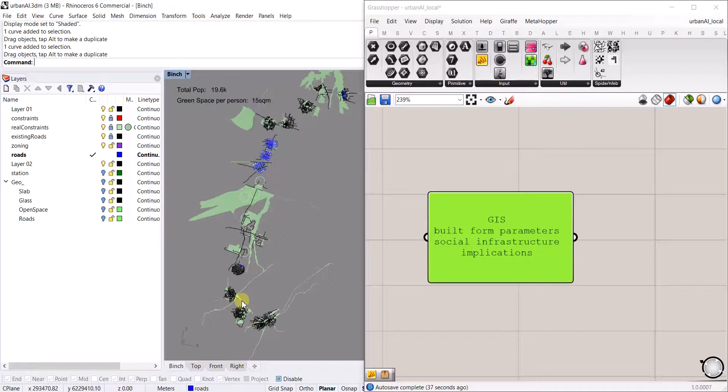automatically. So we have this north-south rail corridor with these station locations that have been nominated. They are completely arbitrary according to the script. The green represents constraints, so you can see a flood layer there, you can see a noise contour there, and we're focusing on this station here, which is sort of station number 15 on the line.

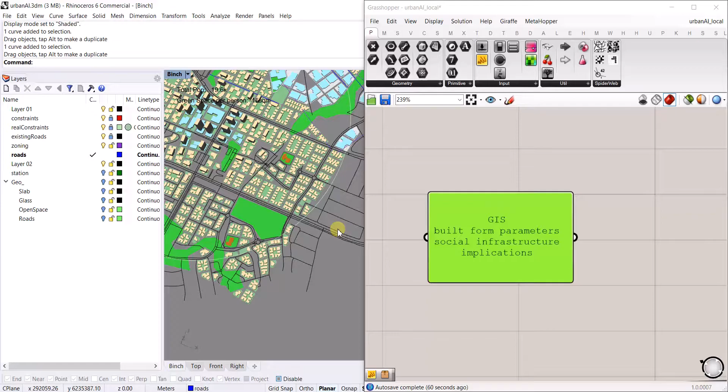We're using the OpenStreetMap API to pull the existing road center lines, and then we're allowing the user to draw these blue lines to be new roads which they want, which the script will respond to, but the script will also generate its own road network as well.

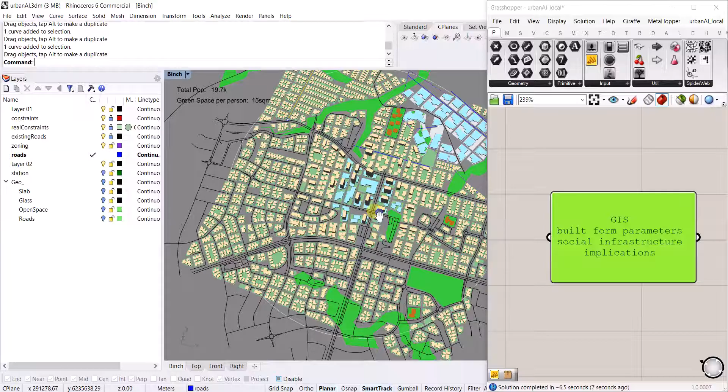And then basically the center of this sort of green circle you can barely see there is the station, and the script places built form within 800 meters of the station. It places residential built form and tries to create built form that is representative of what a residential floor plate is, as well as commercial built form, which the user can control using these curves here.

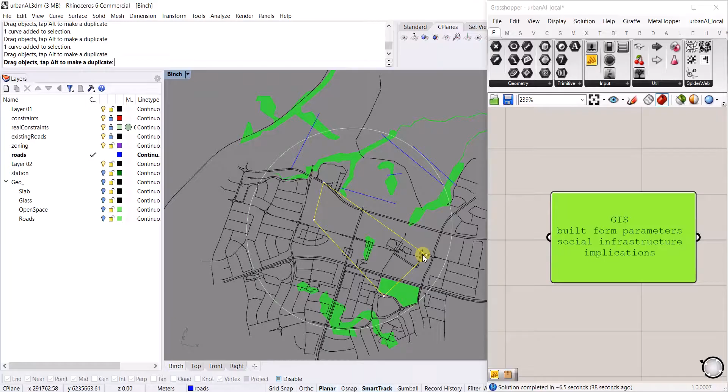So this curve is a commercial zoning, and if we pop that right in the middle there, then the entire central area of the precinct would be commercial, and you can see that the built form footprints have changed, and the towers there are much bigger, sort of commercial towers. So there's quite a high degree of parameterization in the script.

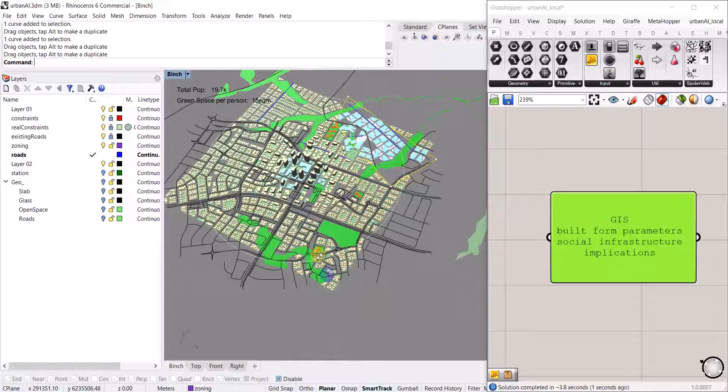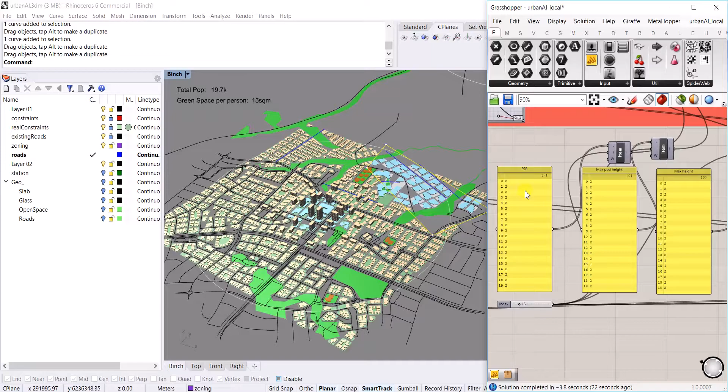I think there's about 5 or 6 parameters, but I'm pretty happy with the variety and sort of realistic built form we're getting with these very few parameters. So let me just go through those built form parameters. And here they are really. There's slightly more than this, but these are the 3 main ones. It's an FSR control, a max podium height, and a maximum height control.

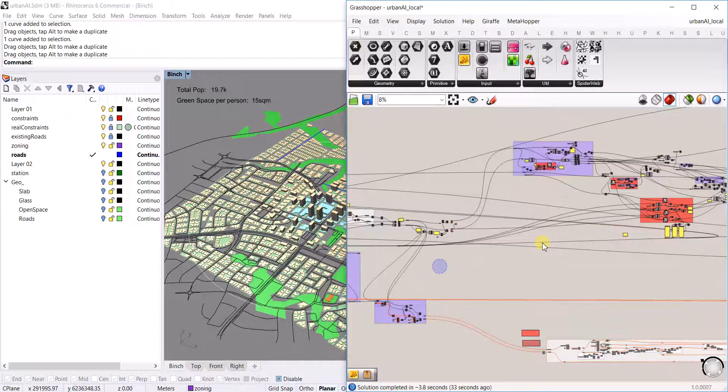The way we deal with them in Grasshopper, we come back from here, create the lots, do something else here, split large podiums, create the podiums here, and then really drive the built form with these controls here. They do it in two steps.

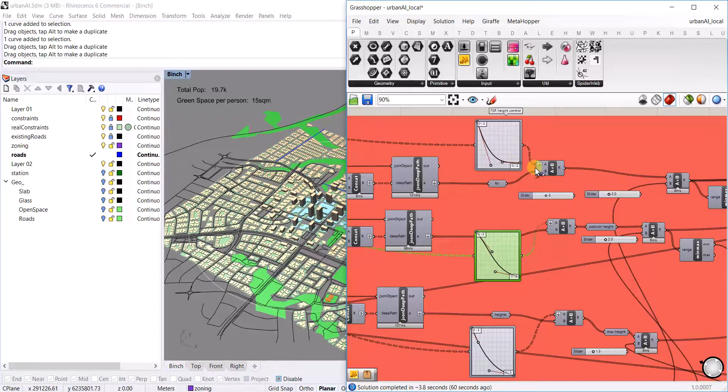The first step is they map the distance from the station to the cadastre in question, with this downward fall. So cadastres close to the station have this high FSR, and as they fall away from the station, they get this lower FSR. Same with podium height and height. And then to make things a bit easier, we just multiply them by a factor, which is arrayed here, and we're dealing with station 15.

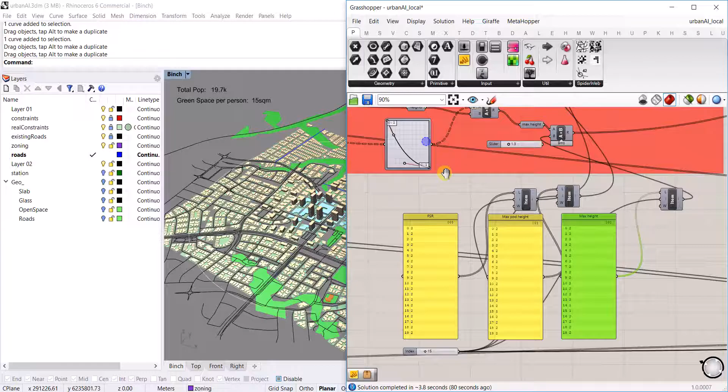So if we were to change the mapping of the height ever so slightly, and then change the FSR factor, we will see a big impact. So I think that's 15. So instead of multiplying the FSR by 2, we're multiplying by 5. Then instead of multiplying the podium height by 1, we multiply by 2. And then instead of multiplying the height by 1, we multiply by 2.

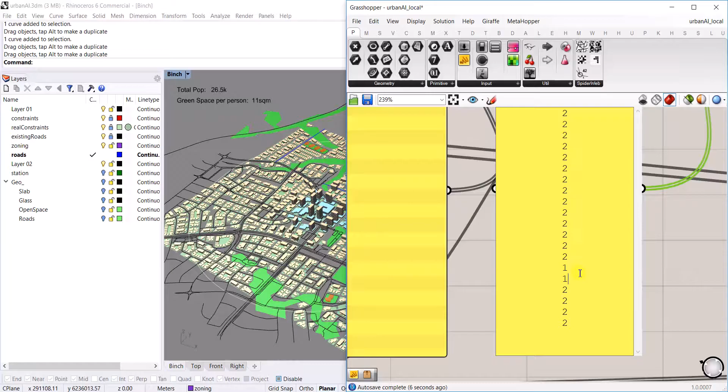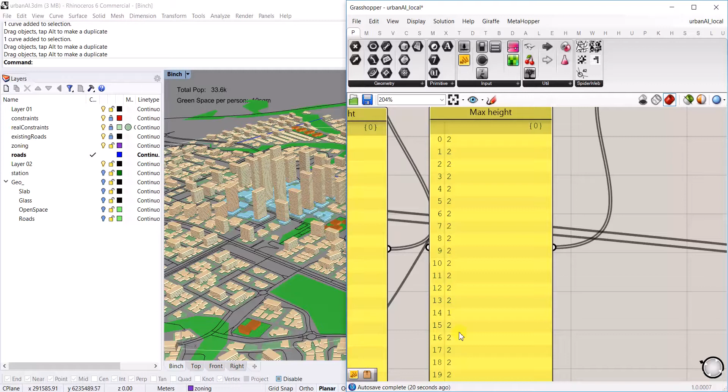You can see that the built form really starts to take off, as each of those constraints is limiting. So by multiplying the FSR by 5, if we go and actually look what we're getting, the maximum FSR around the station is now 15. If we lower the height control to that 1, the script will determine that you can't achieve the full FSR, so the height becomes the limiting factor.

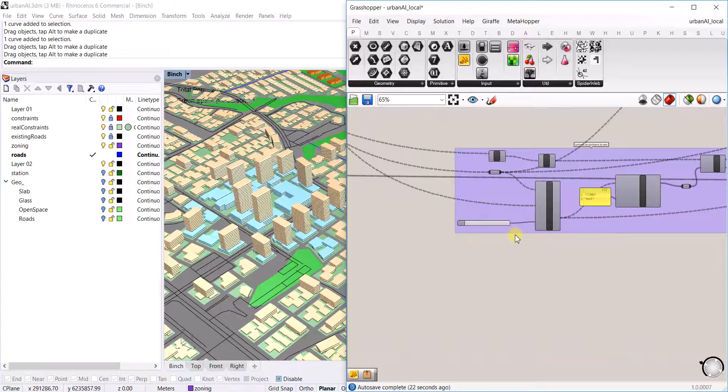So these constraints are sort of AND constraints, so all of them have to be true in order for the script to place height. So that's the built form. The next thing that we do is we can change use depending on how close it is to the station.

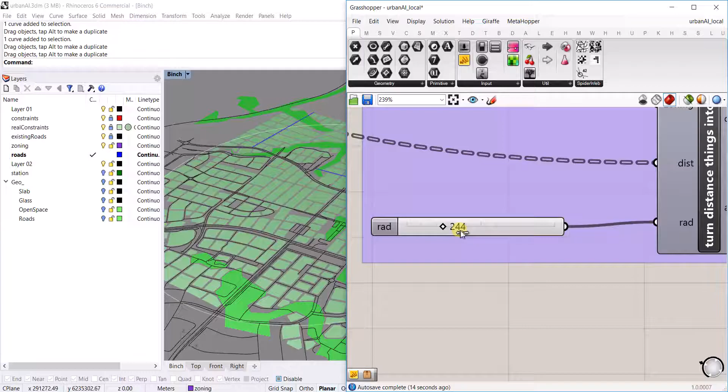So as we change that toggle there, you can see that the mixed use podiums become blue, or become commercial, and that allows you to say, well, within the precinct close to the station, let's have the ground plane really active before we slide to a pure residential mix.

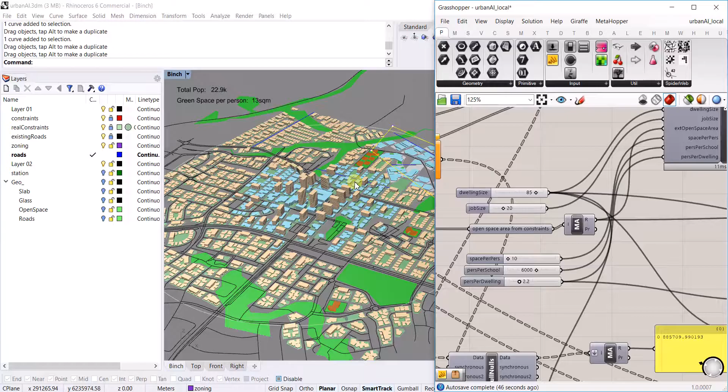And then the final thing, which has been quite cool, is this mess over here, which is the production of a social infrastructure allowance. And I know there's a sort of scientific method: you take the FSR, you take the number of people that you're going to put on an area, and you multiply it by a factor. I think it's number of people, or people per hectare divided by 1 plus factor, something like that, in order to generate the right amount of open space.

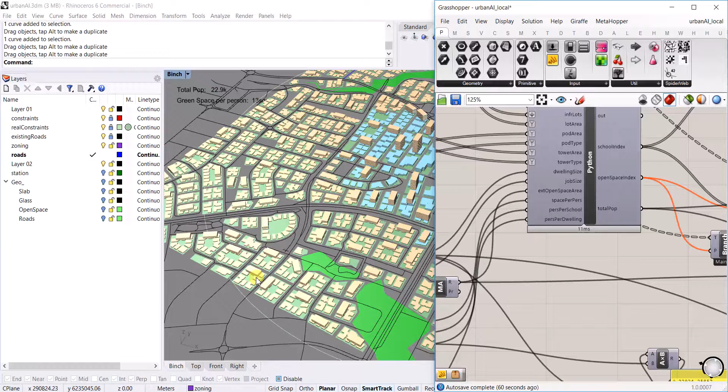What I'm actually doing with the Python script here is just literally taking the built form and then looping through every cadaster, counting up the number of people in each cadaster, subject to these assumptions, dwelling size and persons per dwelling. And then if the space required gets too big, it just turns the next cadaster into open space and then continues on the loop in that way.

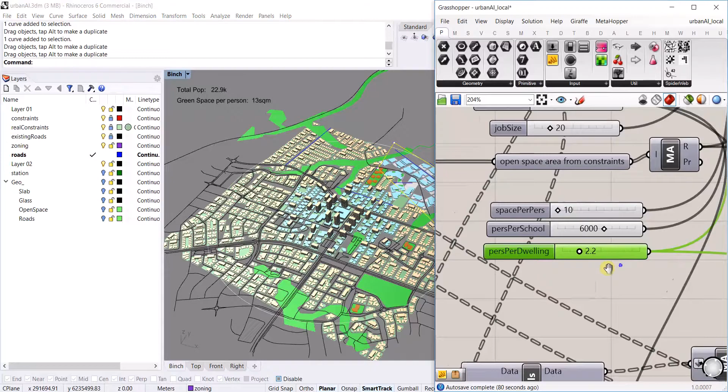So what we can do with this control here, the space per person, which I've set to 10, which is low, is run that. So if we crank that to 28, you can see a bunch of cadasters turn into green. I'll do that a bit slowly. You can see that as this slides up, cadasters start getting punched out. Now, unfortunately, the script's not smart enough to keep those parks out of the industrial zone yet, but we'll get there at some point.

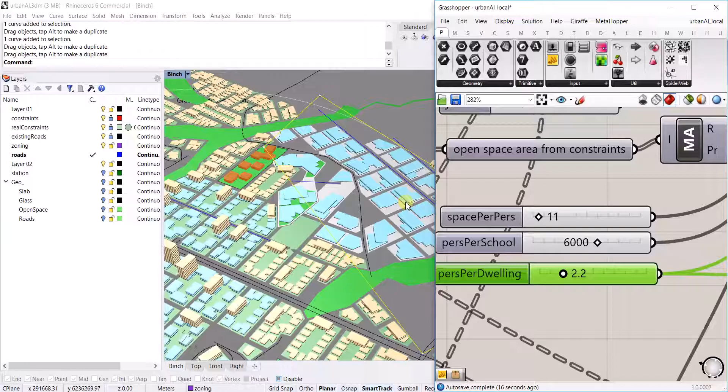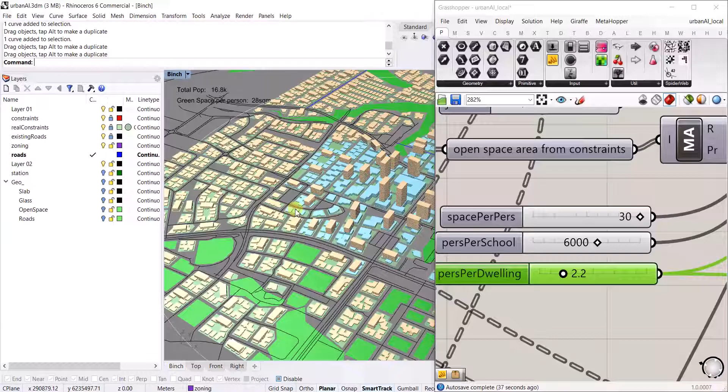And as I do that, you can see the total population falls, and that's because these cadasters here, which used to be residential, have now been converted to open space in order to achieve that number. So this calculation does include the open space from the constraints, so we minus those or use them fully, and when they're fully used, then we start eating into our residential space. And it does exclude this sort of private open space in these mixed use lots. And it's the same thing with schools.

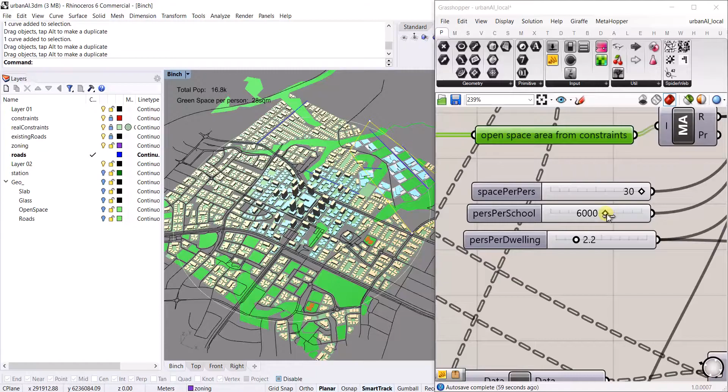So I've got 6,000 people per school, and if we change that, we'll get more schools appearing. So now you can see I've got the reds of the schools. 1,000 per school, we're getting schools all over the shop. And of course, that person per school could be used as person per whatever bit of social infrastructure you wanted, dentists or anything. Yep, so that's, I think, the full scope of what I wanted to explain.

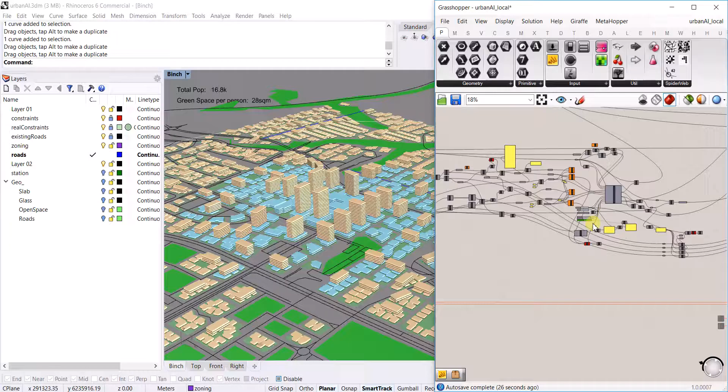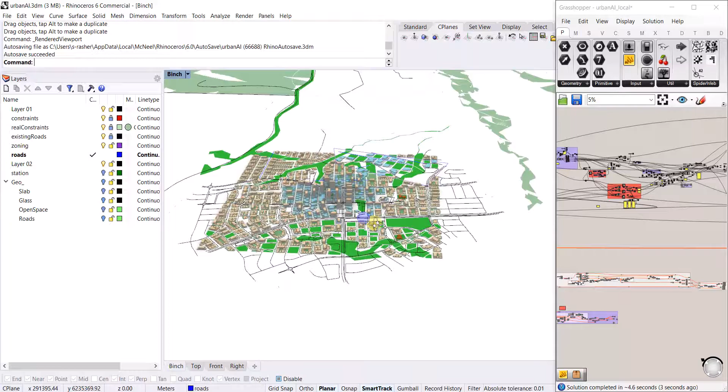I think the discussion I wanted to have is just how nice it is controlling a multiplicity of variables using these high-level factors. So using just FSR, some key ratios, social infrastructure ratios, and nothing else, you're able to generate quite a lot of built form. So if I send the space per person up to 30, and then we crank the height and allow it to come back up, hit 2, what happens is the population jumps, and the number of open spaces also has to jump.

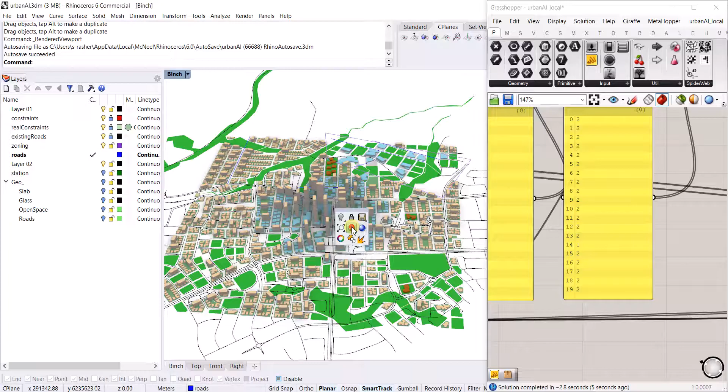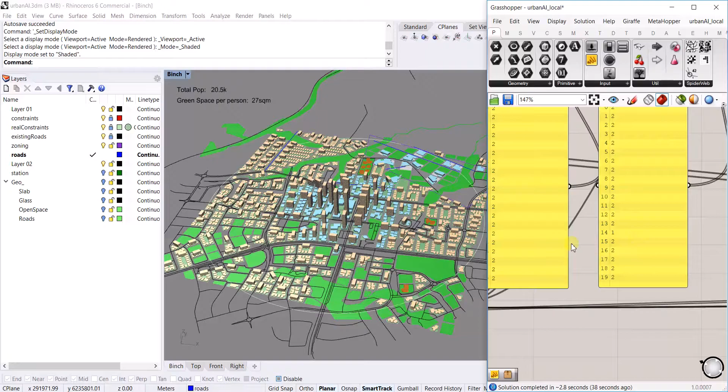I have to get out of this view, into this non-rendered one to see. So the population jumps by 1,000 in the center, but then it actually doesn't jump as much as you would have expected, because it starts knocking out basically all of the residential around, because the open space requirement dictates that these guys need all the space over here. So understanding the connection between the requirement for open space and the population density is interesting, but also the built form outcome like this feels like a very different place to the place that we had just before when we knocked that down to 1.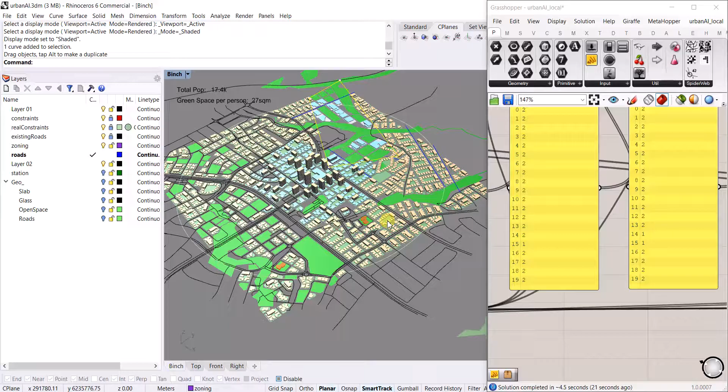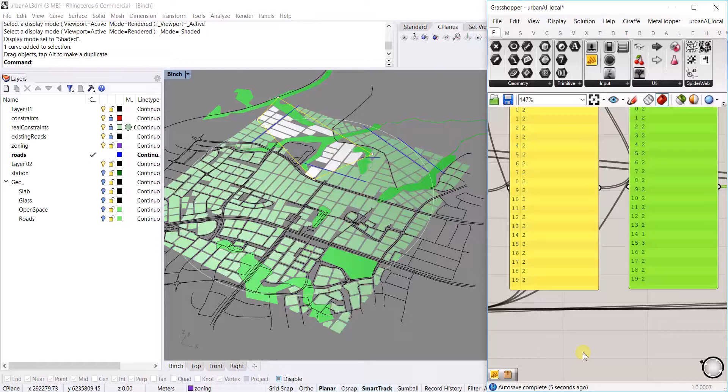So, if you do zoning, height of building, FSR, and some other maps as separate entities, you then try and intersect them or present them to the public in a way they can comprehend. It's almost a losing battle. It's very, very difficult to do. So at least with this, what you get is an actual city that you can look at and say, look, that's about how much park you get. So you're plugging into people's visual cortices. You're leveraging their intuition in a way that you're not when you're dealing with flat maps or static processes.

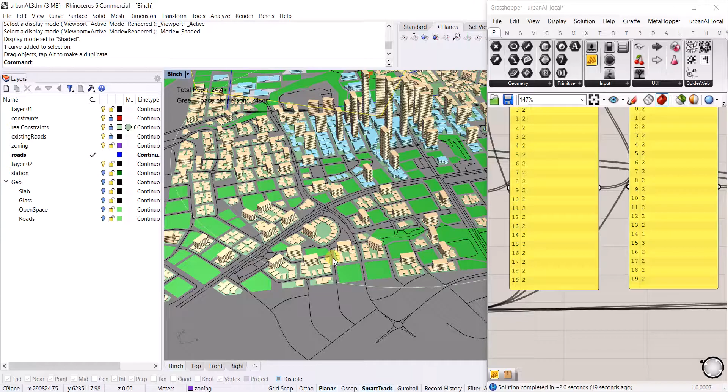So there I've just cranked the height of building and the podium height, and you can see these little towers everywhere, little residential lots in a much greener city. This is something you could have a discussion about. The public may be entranced by this vision of these paddocks or this basically continuous parkland, but with residential towers, and then with a monster city around the station, which is a surprising outcome to me. I wouldn't have picked this, but to be able to explore that design space is really interesting.